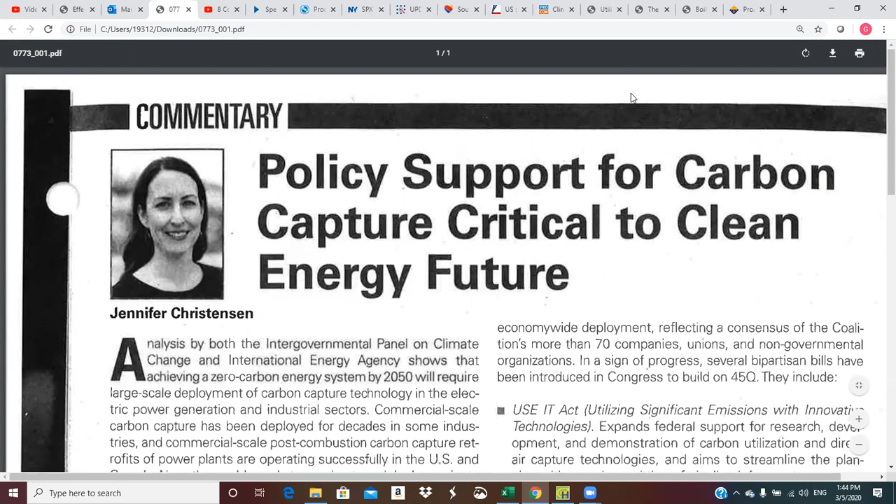Okay, well, let's get started. We're going to talk about this article out of the back of Power magazine. And those of you that weren't here that missed the rambling diatribe before this, shame upon you. You can talk to your classmates and they will, I'm sure, enlighten you.

Jennifer wrote this, and she cites analysis by the Intergovernmental Panel on Climate Change and International Energy Agency, both of which are fairly left-wing organizations, in my opinion. But it shows that achieving a zero carbon energy system by 2050, a long-term goal, will require large-scale deployment of carbon capture technology in the electric, power generation, and industrial sectors.

So this is talking about carbon capture sequestration. There's all kinds of schemes out there. Some people want to capture that stuff and pump it down into geological caves deep under the ground. But of course, it would never leak back out, I guess. I mean, they're going to pressurize it to get it down there, and they're going to pump a gas, or they're going to liquefy it. Either way, it's pretty energy intensive.

And so you're going to have a 200 megawatt unit, and you're going to use 125 megawatts to get the carbon buried down under the ground. After a while, it seems to me like this is diminishing returns. So if we have to do this, maybe there's other alternatives.

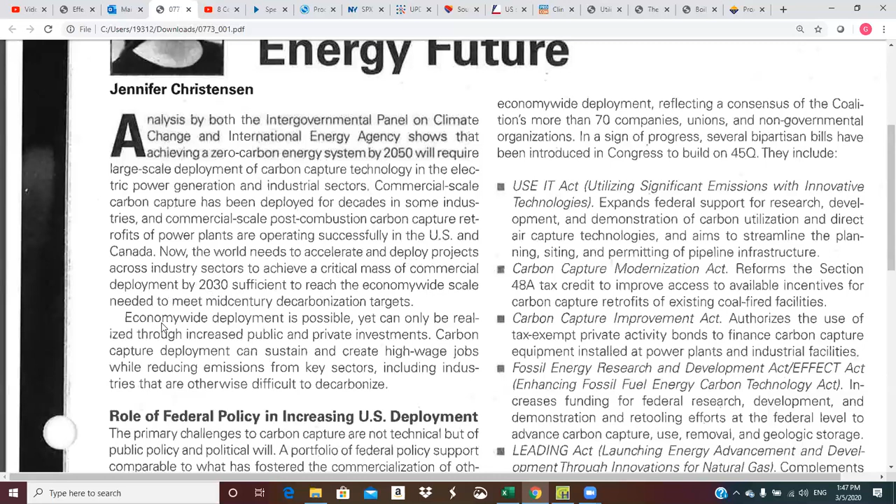Now the world needs to accelerate and deploy projects across industrial sectors to achieve a critical mass of commercial deployment by 2030, sufficient to reach the economy-wide scale needed to meet mid-century decarbonization targets. Economy-wide deployment is possible, yet can only be realized through increased public and private investments.

We're going to have to spend a boatload of money to do this. And who's going to pay for it? You say, oh, well, the government will pay for it. Well, okay, so they're either going to just write a check and it's going to go on the national debt calculator. Have I shown y'all the national debt calculator in here this year? Oh, we may have to do that today too.

Or if the power industry has to pay for this, you know where it's going to come from. It's going to come from the ratepayers because they got no place else to get money. So your utility rate, instead of paying 9 cents a kilowatt hour, if they start doing this stuff on a grand scale on TVA, I'm going to be paying twice that, 18 cents a kilowatt hour. I'll really yell at my wife for not turning the lights off. She won't ever turn a light off. She hates the dark. I hate the light at night because I have to pay for it.

Anyway, that's just the way it works. So that's what this is getting into. Role of federal policy in increasing U.S. deployment. The primary challenges to carbon capture are not technical, but of public policy and political will.

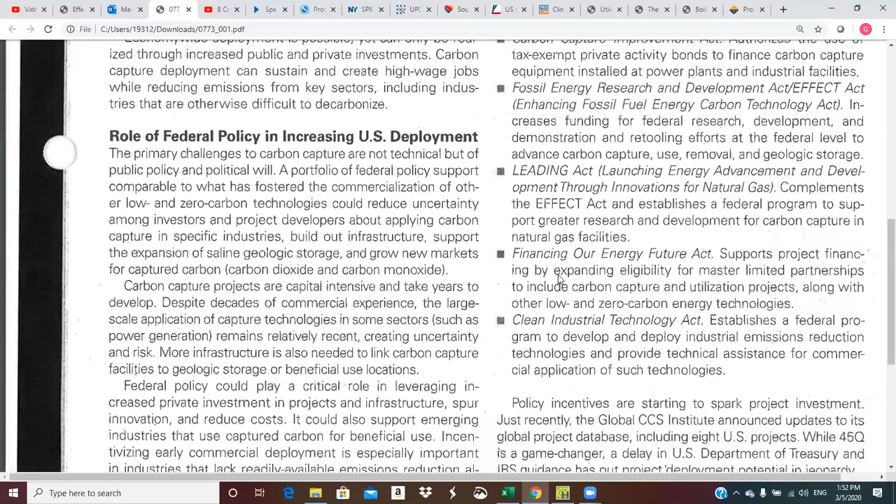Anyway, that's enough, I don't want to do this tirade forever. You guys probably enjoy it more than the other stuff, but anyway, just read through this, and if you want to incorporate a little of this into this little position paper you write, that's fine. You got plenty of time to do it. Okay, comments?

I find it funny that she's trying to say that it's not a technical issue and that it's just a political one, because that's pretty much the opposite of what I think on the problem.

On carbon capture? Yeah, but she's saying it's not technical. Well, I know there have been some pilot projects, but I must say I'm probably not up to the latest on this, but there's not been widespread adoption. Now in some industries, some companies may be recovering some of this in order to produce a carbon-based product that they can sell. If that's free enterprise doing it because there's a market for it, go for it. That's where a lot of the argument is - it's just the technical side of it. Whereas, don't try forcing a lot of this kind of stuff onto the public at taxpayer dollar.

Well, back during the Obama administration, what they supported with some of the solar - what's the solar company? They dumped $500 million in, and then it lasted another 6 months, and then went belly up. Solyndra? Yeah, it was Solyndra. And then there was the one up in Clarksville that had some government support, producing solar panels, and I think they've shut down production because they couldn't compete. But part of that could go back to what Trump's trying to do with tariffs to level the playing field. If he puts tariffs on Chinese solar collectors, then some American companies may become more competitive. I don't know, each one of these issues is pretty complicated.

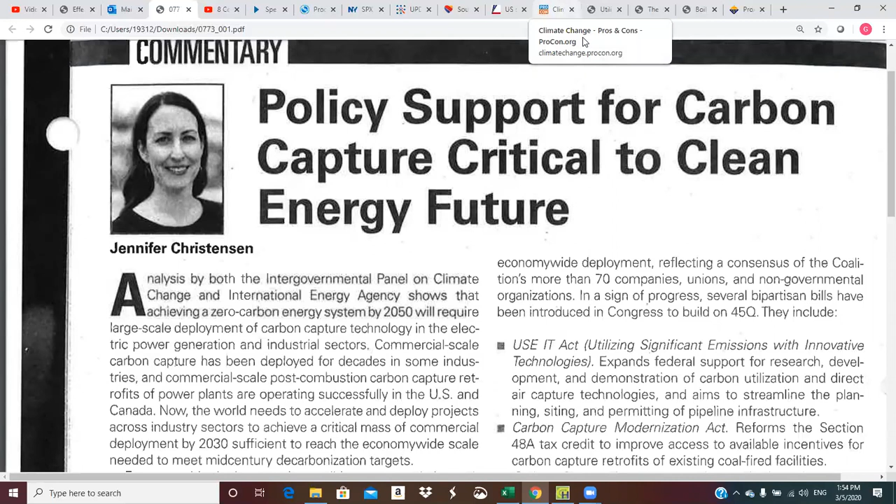All right, so we're through that. We did that. Okay, so back to my cryptic notes. I know you love these. I do too.

I wanted to say a few more comments here. I kind of went through the flue gas stuff. Oh yes, and I have an animation or two for you. So let's start, we'll just go through some of these topics. For SO2, scrubbers with limestone. Let me show you this - this actually, they may show us this. This comes from TVA, but this is an animation of what a utility-sized scrubber looks like.

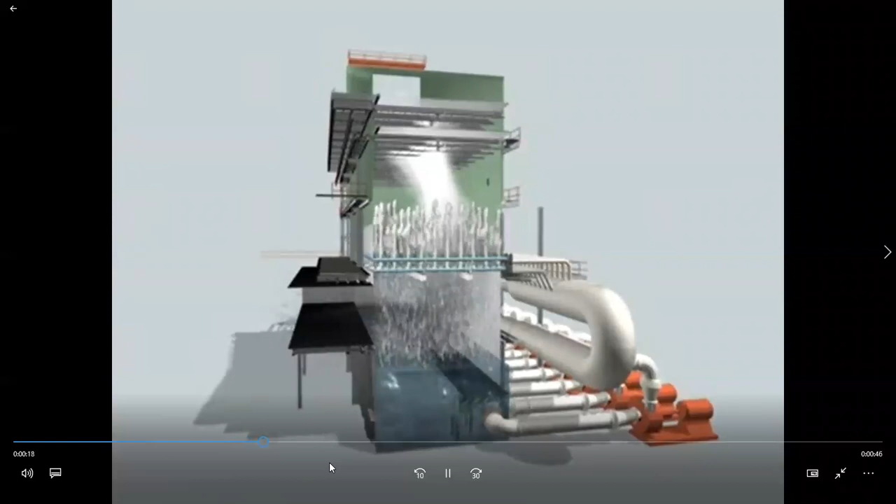This is pretty cool. So there's two different configurations. This one, you see the gas coming in the side and turning up. That is water with limestone dissolved in it. So calcium and SO2 form CaSO4, which is a solid, okay?

And so the solid has to be continually pulled out of the water at the bottom of this. They keep feeding limestone into this, and it's basically a spray wash. Those are the dirty flue gases coming in this configuration, and they come in the top and get cleaned by all of the water sprays.

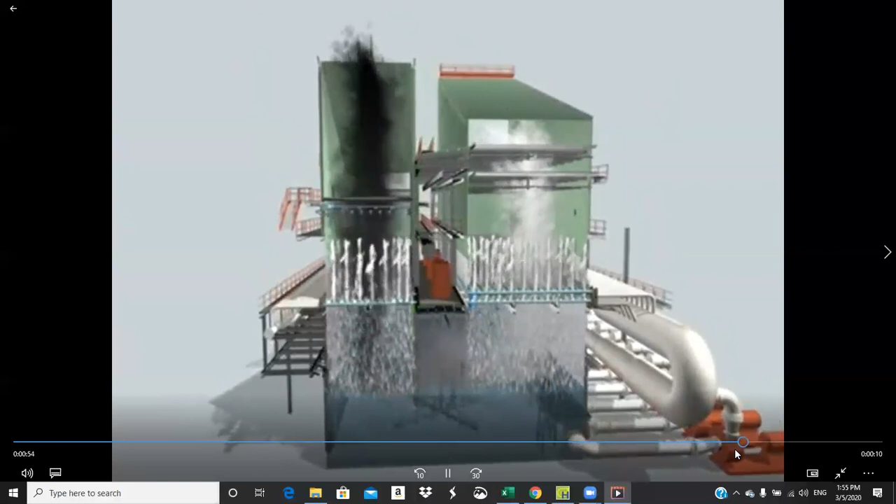And look at all these pumps over here - you've got a whole row of pumps, several thousand horsepower of pumps operating. That's additional plant load, parasitic load, that it takes to make these things operate.

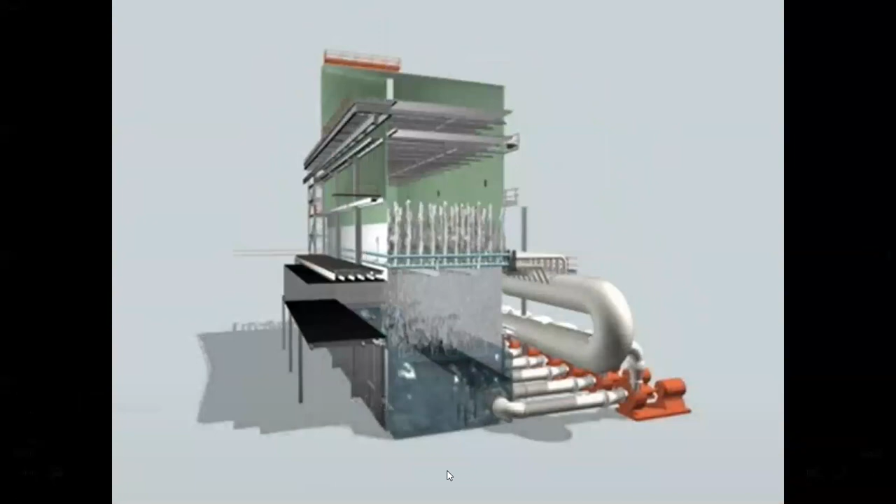If you make the trip to Kingston, they have some configuration you can't hardly see - you just see a big box from the outside and they show you the video. But you can go down and see the pumps and all the stuff that has to operate to make this work.

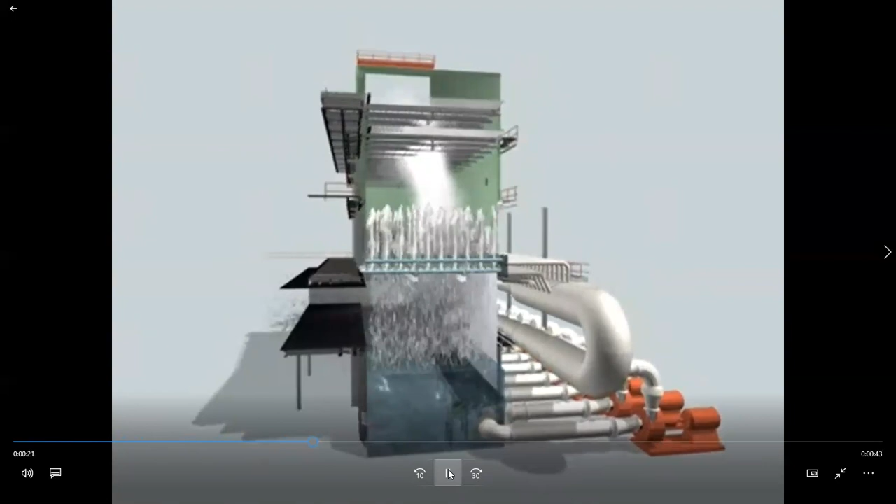Then they pull that CaSO4 out of that water bath, and that becomes a product that's saleable, so that sulfur and calcium can be recycled, like into wallboard and stuff like that. It can be mixed in with that, I believe.

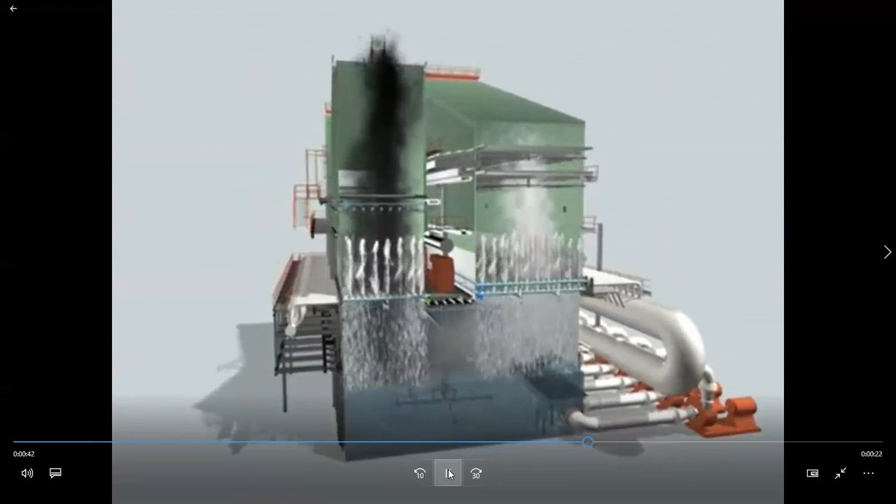So that's how a power plant cleans up the dirty, nasty sulfur, and it's pulling other stuff out of there too. When you spray all that water in there, you're going to pull particulates out, and I'm sure it pulls out some mercury and other stuff. But it's primarily designed to remove the sulfur.

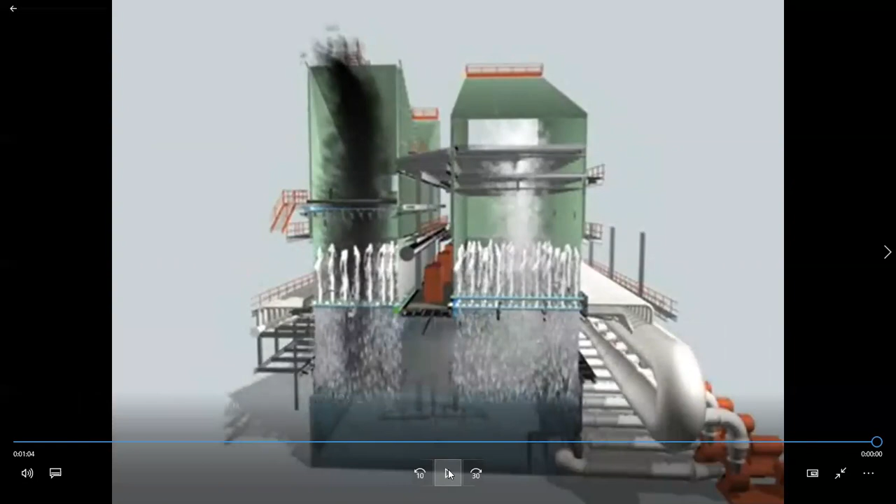So that's cool. All right, and I got another one here we'll get to in a minute.

So that's it. Now on the NOx - you'll get a detailed chapter on this later, but some of this fundamental stuff I want to make sure you get. There's really two sources or mechanisms by which power plants produce NOx, oxides of nitrogen: one is thermal, and two is fuel.

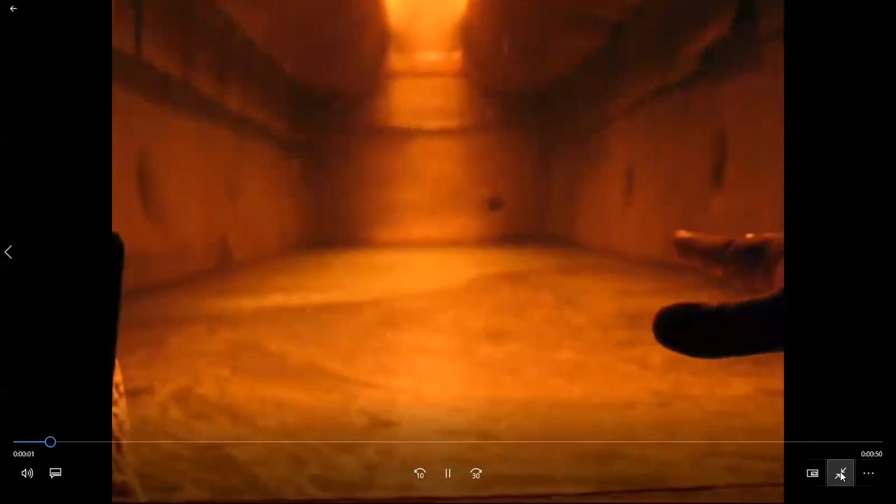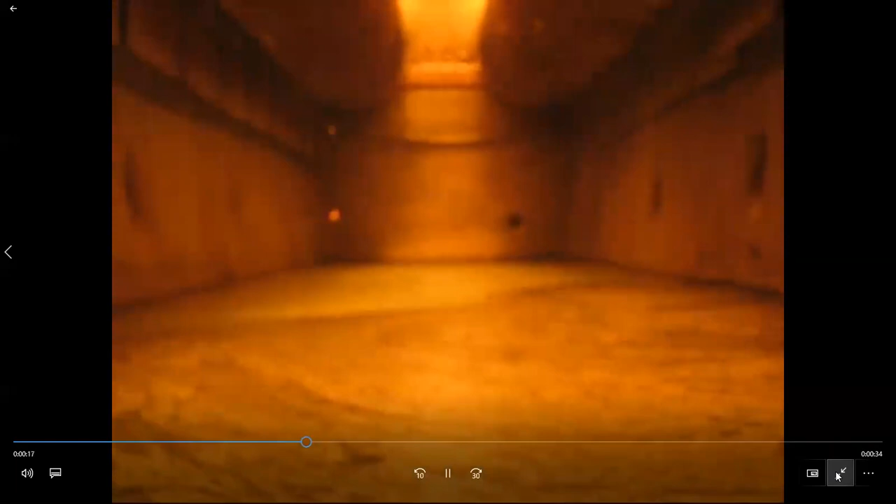This is Kingston. That's down at the bottom of the boiler - that's my favorite view. They got a door, you go down in the basement, open the door, walk up on this little platform, and you look up. This is what they call clinkers and stuff that has attached to the boiler tubes that's fallen down. Sometimes they try to keep a little water down there on the bottom so that stuff will kind of quench out.

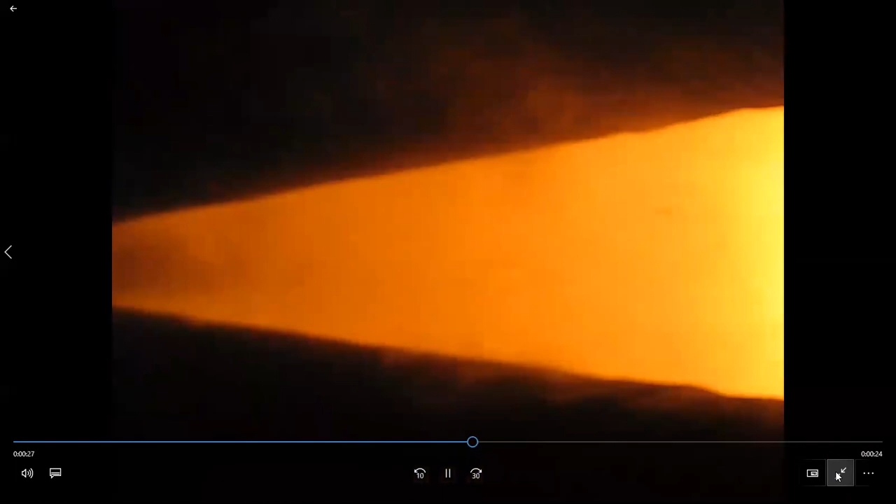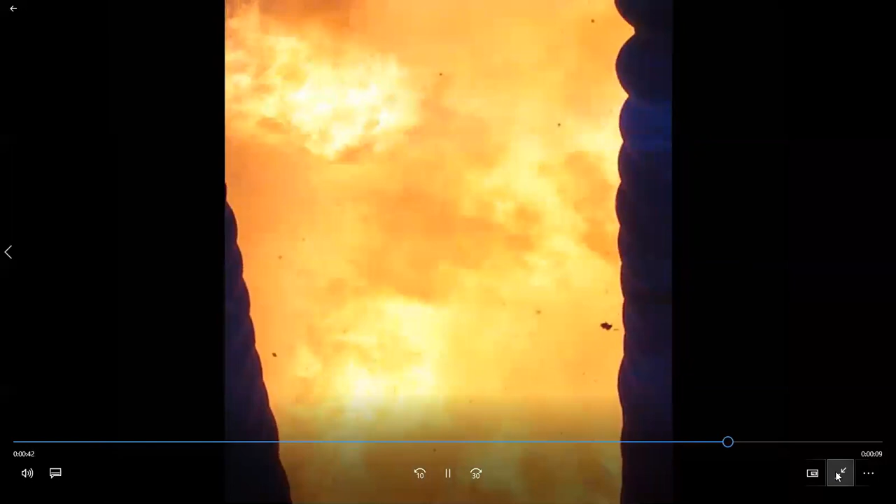But that's looking up - that's the fireball up above. This boiler is probably 100 foot tall, something like that, and we're down at the bottom looking up. You've got these burners shooting coal and air out into this fireball, which is probably swirling around a little bit, and you see the walls over here are lined with tubes.

All of this enclosure is lined with tubes, and that's where the steam is generated. We have water that comes out of the steam drum that gets sent to the bottom of the boiler, and then it spreads out into headers that feed all of these individual tubes. So you have water circulating through these tubes, and that's what keeps the boiler from melting.

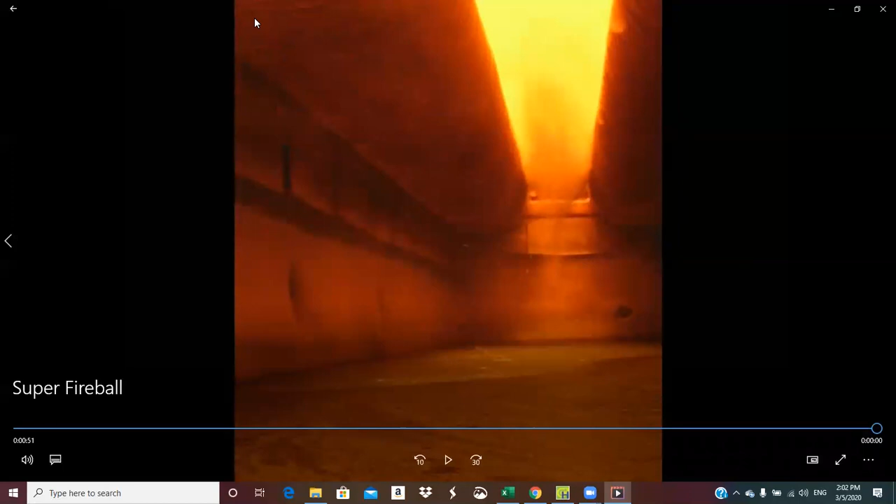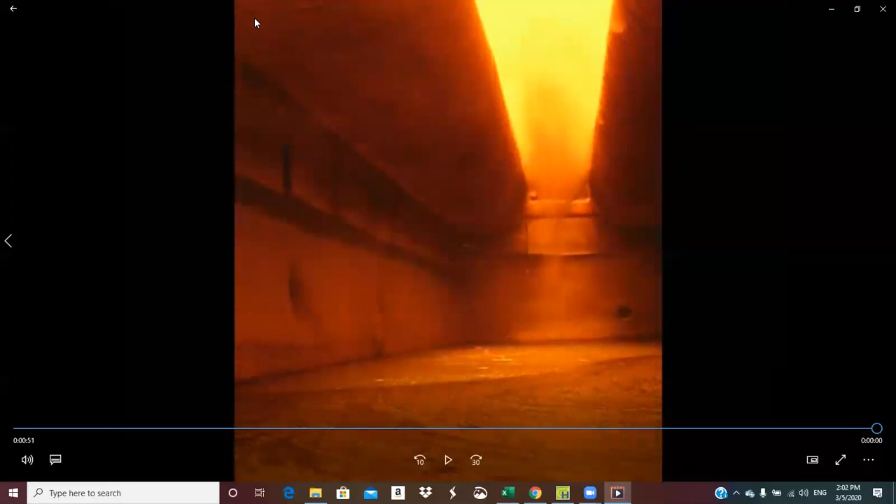Because, if you don't have circulation, water flowing through those tubes, you're going to have a pile of molten metal pretty quick, because this is 2,500, 3,000 degrees. That's hot enough to melt steel. The entire furnace is enclosed with tubes.

I was looking for some pictures. That's Mike Coffey's hand, he was a Tennessee Tech guy. He's sitting there talking, but for some reason, I guess, wow. All you really hear is the roar.

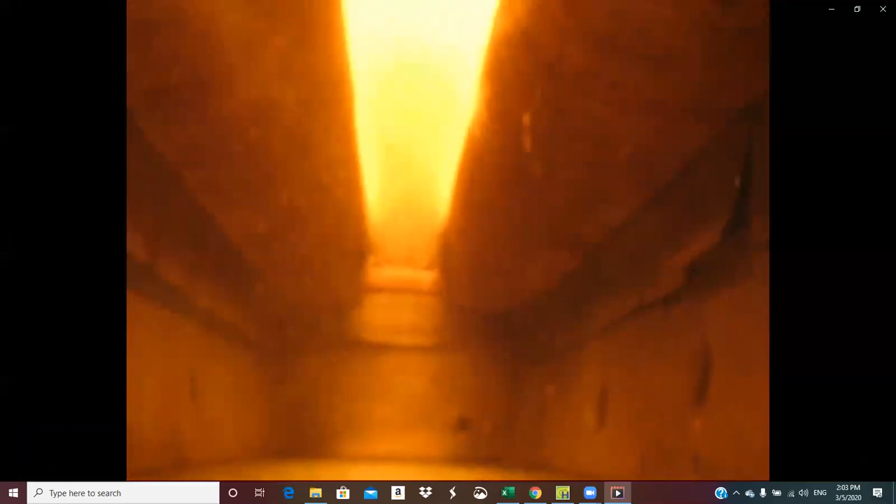So if you make the trip, that's always make sure that we go down there, but there you go. That's the fireball up above you.

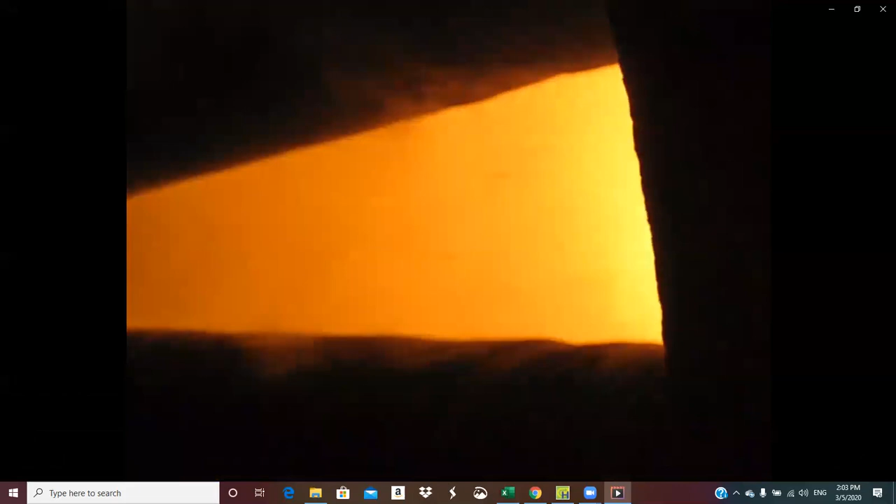And let's see if we get a good shot of the tubes. I think this is somebody, Jackie Sherrill, put this together for me on his cell phone. I've got some others, but he did a better job than I usually do.

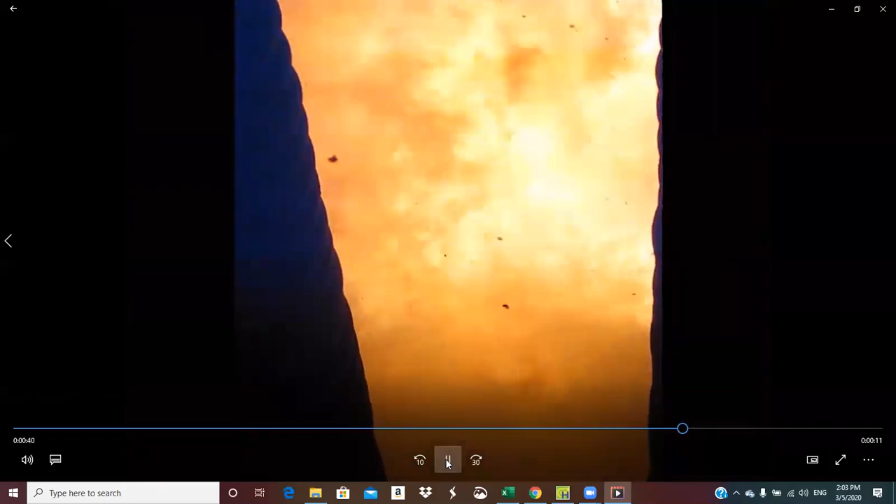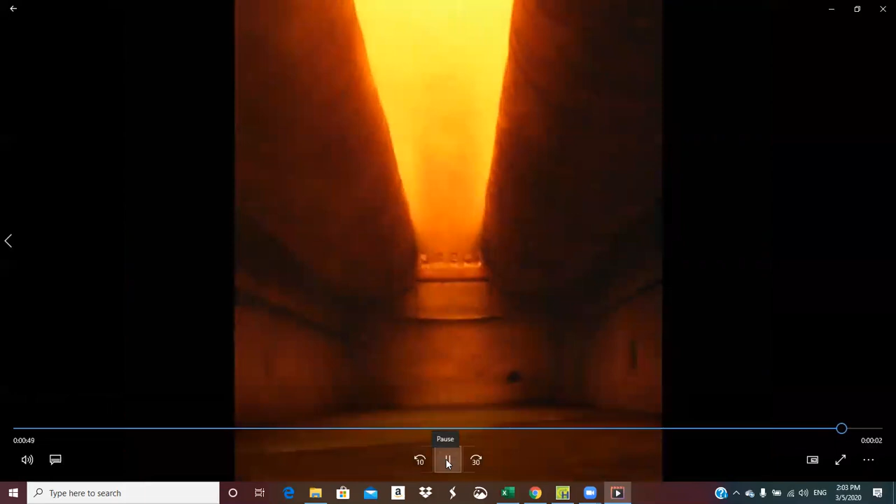Get back over there. I hit the button. There you go, you can see those tubes right there. And they collect ash. They get deposits on them.

All the way through, and this is the furnace section we'll see. So the heat is released in here. The steam is generated in those tubes. The steam goes to the drum where it's separated, and then it goes back to the boiler, back into the convection pass where it is superheated, where the reheaters are.

We've got multiple different heat transfer sections in this boiler, okay? But these are the furnace tubes, called water wall. Those are the water wall tubes where the steam is generated, okay?

We have what's called, see this opening? It has openings every so often so they can put a soot blower lance. They have soot blowers at different levels, and they can roll these things in while this thing is operating, and it blows either high pressure water or low pressure steam. You can use acoustic horns, different ways to knock the ash and soot off of those tubes. So they can clean the entire furnace with different combinations of soot blowers. On any sort of solid fuel boiler, you have to be able to clean the heat transfer surfaces.

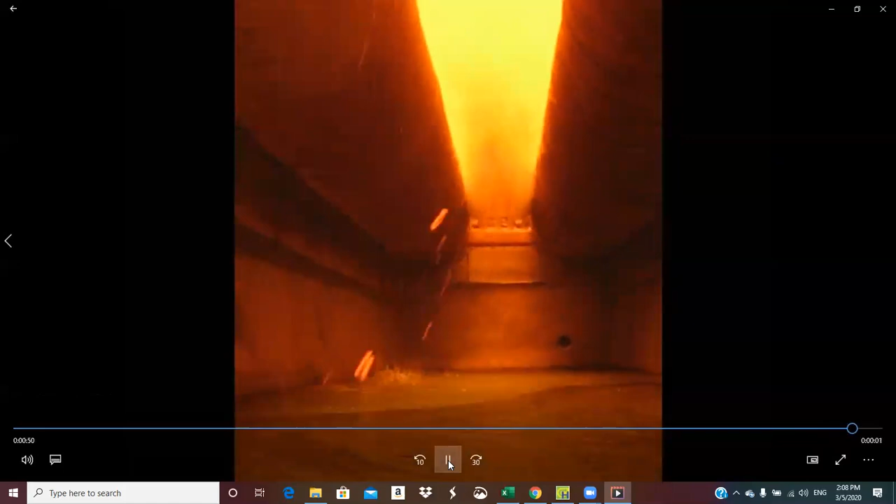I love it. Man, if you wanted to get rid of a corpse or something, just toss it up in there, right? Anyway, not that we would ever be wanting to do that.

Okay, all right, so let's stay on this. So thermal NOx, after seeing that fireball, knowing that we've got all this nitrogen going through that system, what do you think thermal NOx is? Anybody want to hazard a guess?

What's disassociation besides when you unfriend somebody on Facebook? Yeah, it's when an N2 decides, enough, I can't stand you anymore, we're splitting, and they become an N and an N. An N2 is pretty inert, it's a happy couple, but an N by itself is looking for companionship, out making the Friday night bar scene. And if that N meets up with an unsavory character, all of a sudden, instead of getting an N2, you get an NO. And you can't take them home to meet mama, because those O's, man, an N can't bring an O home. It could be worse, you could get an NO2. Or it could be worse, it could be an O3. Now, that's a little kinky. But anyway, that's what's called thermal NOx.

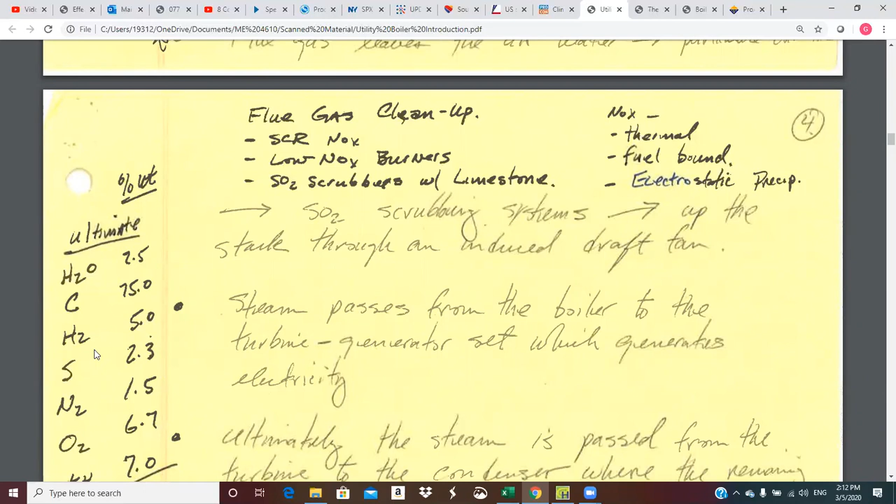Okay, ultimate analysis. This is one of two analyses done on coal, as far as combustion properties. There are lots of different tests - if you look in the Steam book or online, there's ash fusion tests, probably 10 different coal characterization tests, and ASTM standards on all of that. The guys that purchase coal are on top of all of that to make sure they put out the right specs for the coal they want for their boilers. There are different types - anthracite, bituminous, subbituminous, and more. So the world of coal is very complicated.

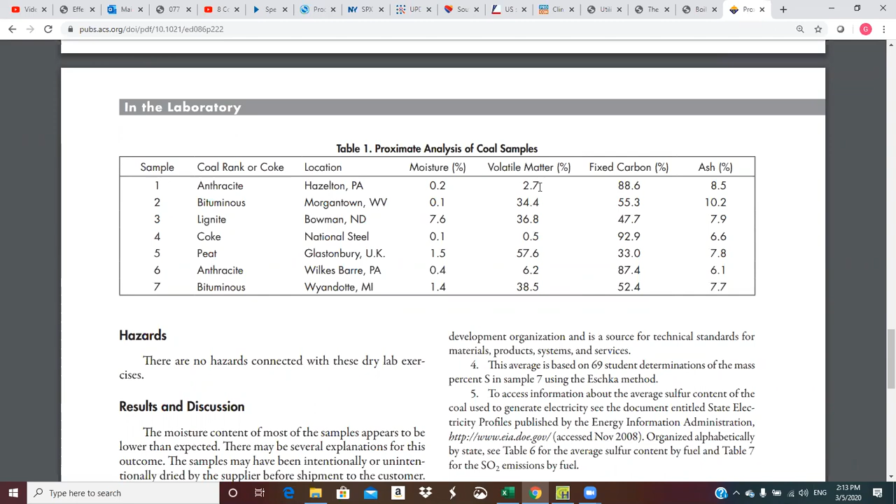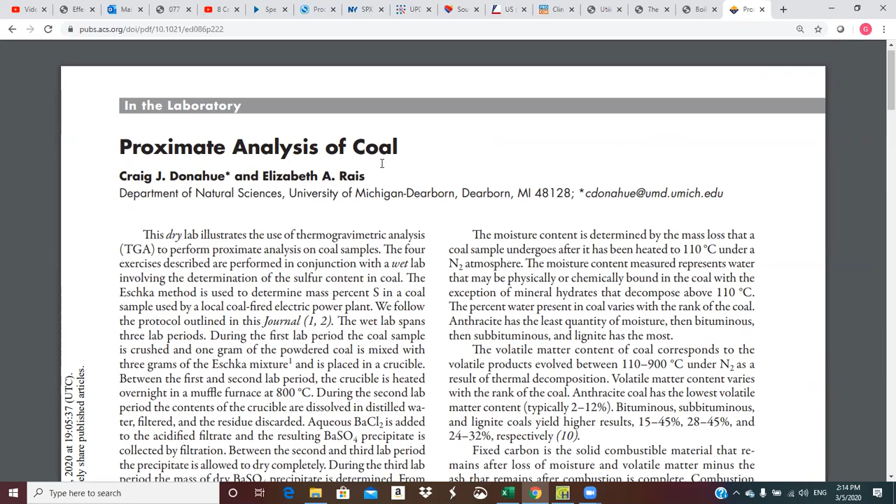So there's ultimate and then there's proximate analysis. I didn't have anything written up in these notes about it, so I searched this up, and I can send this out. This is actually a test - there's a little test protocol here. I hadn't seen some of this before, but this is, in the laboratory, proximate analysis of coal, and there's more here than we need to know.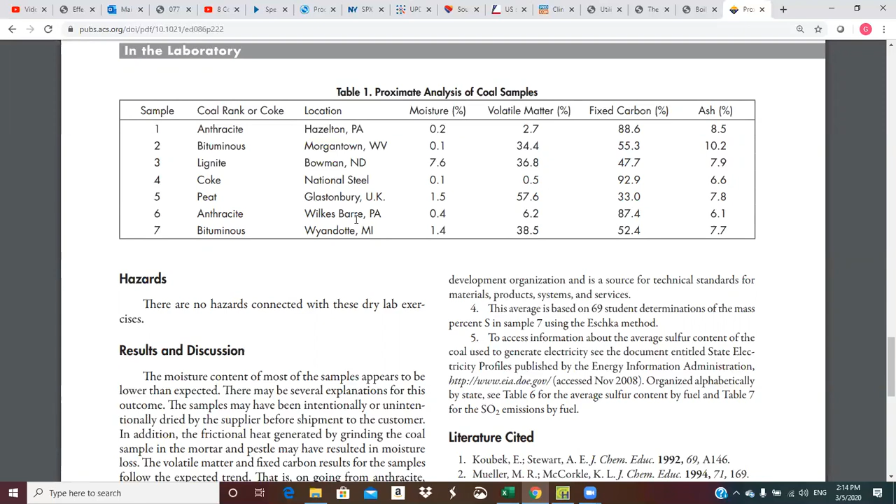What they determine from this is moisture, volatile matter - which is essentially the hydrocarbon gases that can be driven off and burned almost instantly - then there's the fixed carbon, the solid materials that'll burn, and then there's the ash. That's what a proximate analysis is. That other list of all the different elements, I'll put it back up there in a second, is the ultimate analysis. But this is kind of interesting, I hadn't seen this before.

So what they do, apparently - and I had some idea in general but hadn't seen the fact - is they take a certain amount, grind it up, and heat it up for a while. Initially they heat it in a nitrogen environment so nothing will oxidize. That makes sense. You can see it starts out at 100, and after a certain length of time, maybe 25 minutes, it goes down a little bit. Initially that's moisture loss, then the volatile matter coming out - those hydrocarbon gases. Then they switch to air at high enough temperature, around 900 degrees C, that's pretty warm, and then they burn it. So that's the fixed carbon determination until this comes down, and what's left is ash. It kind of makes sense. But anyway, that's proximate analysis.

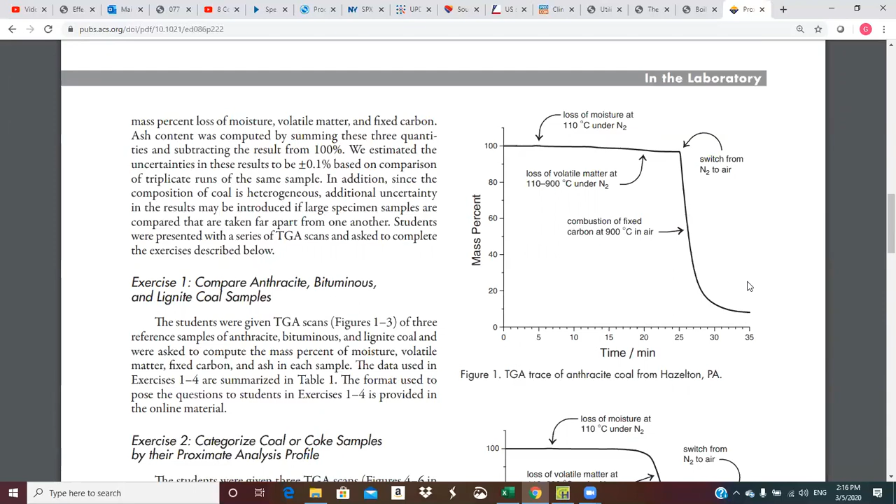And for the ultimate analysis, I'm sure it's got to be much more complicated.

So, do they get one type of coal from a certain region and another type from another region, or can one mine produce both types or multiple types?

No, they get it from different regions. In fact, TVA now, at least the last couple years we've been up there, they're blending. There's PRB, Powder River Basin coal, from out in Wyoming, Montana - that's a big coal producing area. That's more of a low sulfur, high ash, low BTU coal - not great BTU content, but it doesn't have a lot of sulfur, and it does have a lot of ash. They're blending that with some bituminous or subbituminous from maybe Kentucky, Pennsylvania, West Virginia, roughly a 50-50 blend. That's complicated because they've derated the number of BTUs they're putting in, but they do it for emissions - emissions rules the roost. Whatever their basic decisions, the first thing they consider is emissions - what can we do to better control emissions? And then they say, well, that's going to be a hit on heat rate or efficiency - too bad, heat rate's not in first place anymore, it's emissions.

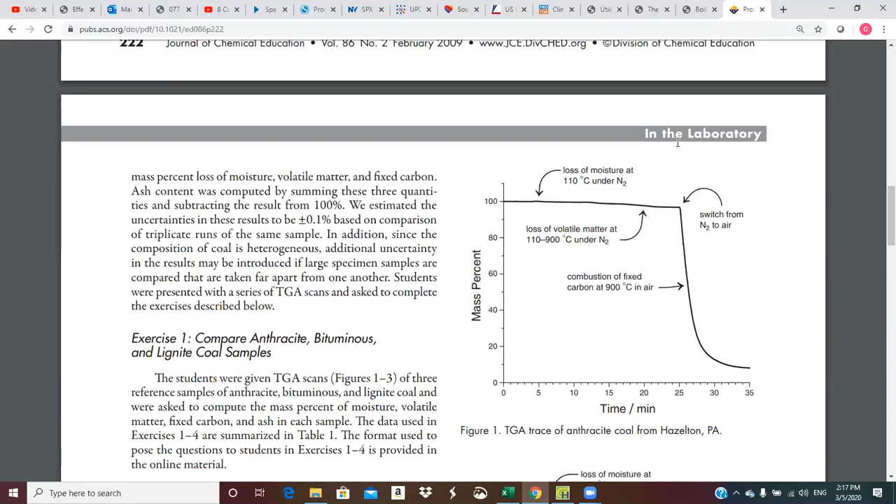So we've got ultimate analysis and proximate analysis.

And if you want to learn more, just Google 'ultimate analysis coal' and you'll find plenty of information that will jump up in your face.

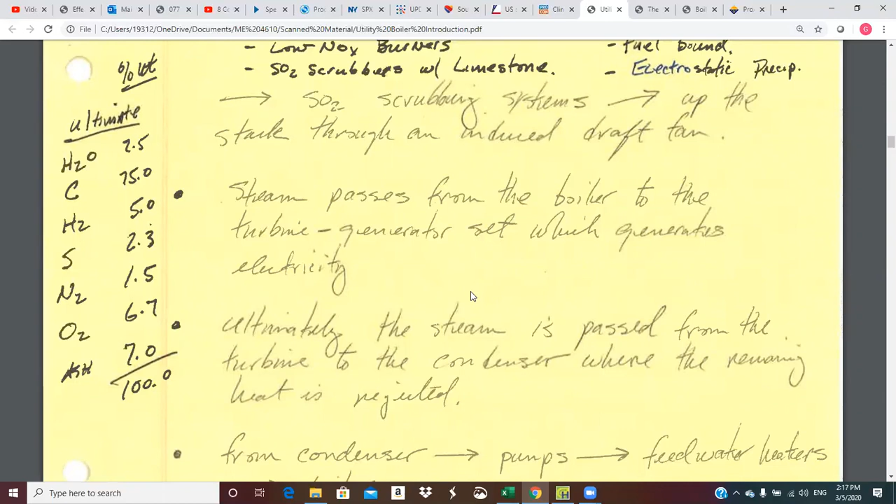Okay, tube spacing. So we talked about different fuels. Now that you've seen the boiler tubes, if a boiler is designed for coal, the tube spacing in the furnace is pretty tight. If I look at that steam-generating portion of the furnace and take a cross section, I've got my structural steel in back, but all of these tubes are basically right beside each other all the way around.

After a while you get tired of drawing these little circles, but they go all the way around like that. And then that water's coming up and that fireball's in here, and some of that liquid is being boiled off into steam, and then we separate that out up at the top. We'll talk more about that when we get to other portions of the boiler.

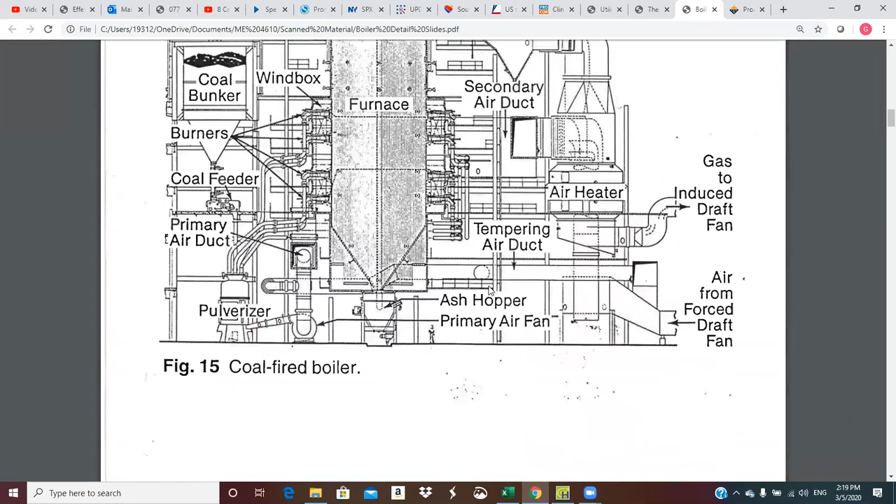Let me see, that's why I gave you some of these. I'm not sure which one's the best. This is pretty good, yeah, okay.

So here's your furnace water wall tubes over here, your fireball, your burners, and all that stuff. The gases come up to the top of the boiler. There's the steam drum, and then they turn sideways and go across all of these heat exchangers. This mixture goes back to the drum, we separate out the steam, and then the steam flows back to these various heat exchangers and picks up additional temperature. So that's where the superheating occurs.

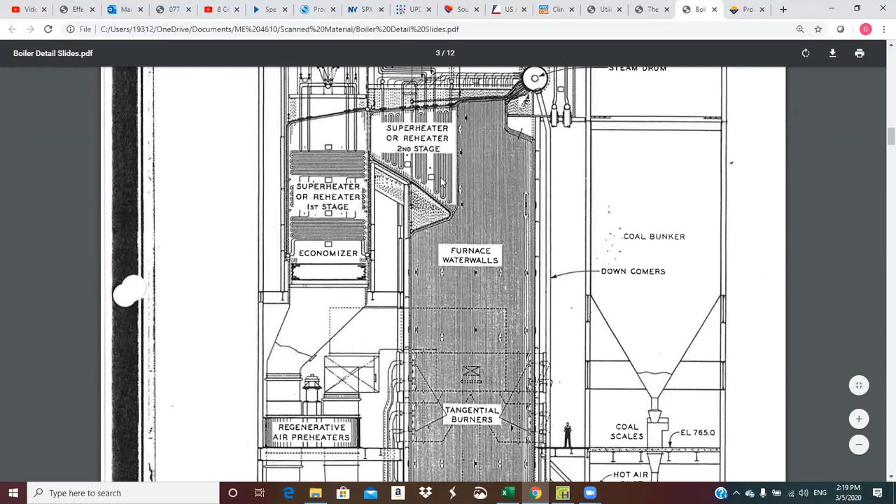So the spacing on these - these are just heat exchangers in the gas pass, and the gas has to pass over there. If you're designing a boiler for coal, you have to leave more passages, more spacing, because this is going to foul up. You're going to get ash, and you have to accommodate that - you've got to be able to spray that stuff and get it out of there to keep it clean. If you're designing for natural gas, you can pack those tubes together because there's not hardly anything to plate out on them on the outside. So your tube spacing in a boiler is dependent upon the fuel it's intended to burn.

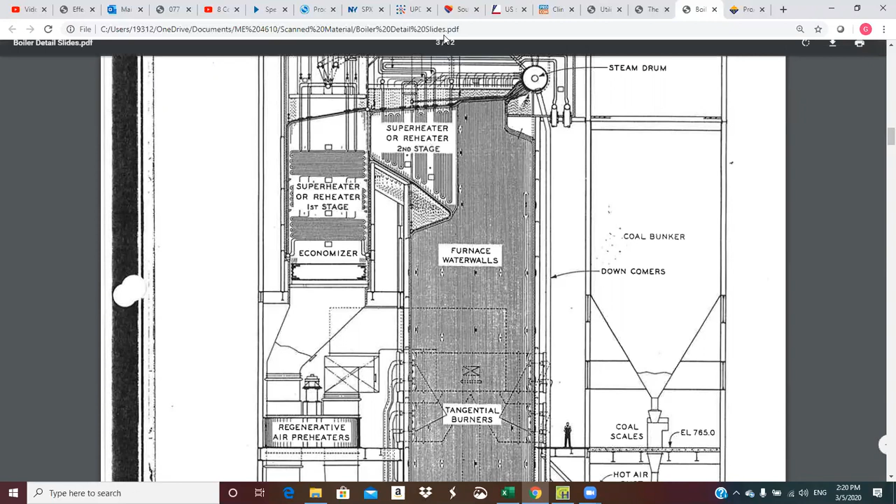So that's the comment about tube spacing, unit size for the same steam production rate. The natural gas boiler is going to be far smaller. You don't have all the fuel handling issues, you don't have to space the tubes as far apart, and all of that. And of course that relates to the expense of the boiler - how much you're going to have to pay for this thing on the front end.

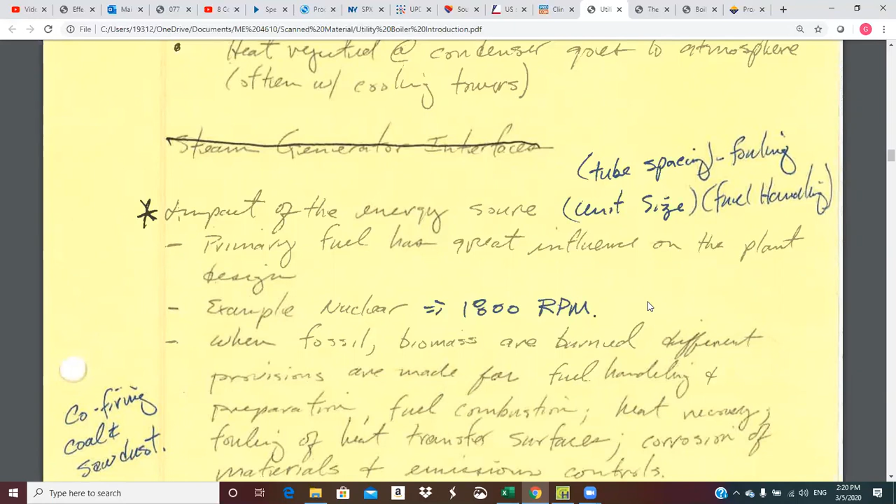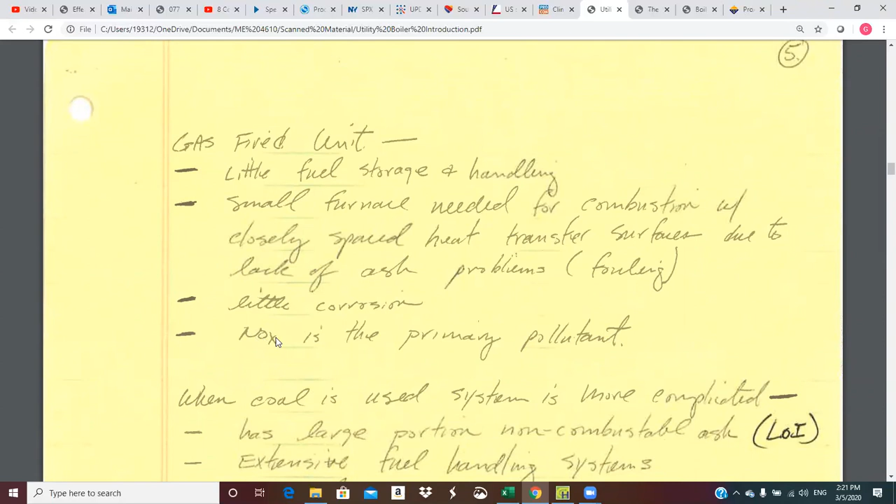Gas fired, yeah, smaller footprint. For natural gas, NOx is pretty much your only real pollutant.

Okay, when burning coal, this is LOI - a power industry term you need to know.

Periodically on a coal boiler, this should be done - I'd say probably every two months or so, I would recommend. I'm not sure what TVA does. You go to the ash pile and you take samples - there's an ASTM standard on how to sample an ash pile. You can't just go out and grab a little cup. You've got to go to certain places and certain depths and all this. But anyway, you get your ash sample, you send it to the laboratory, and they tell you how much carbon is in the ash.

Now, what do you think about carbon in the ash? Is that a good thing? That's fuel that you bought that you didn't burn. So carbon in ash - the power plant term for that is LOI.

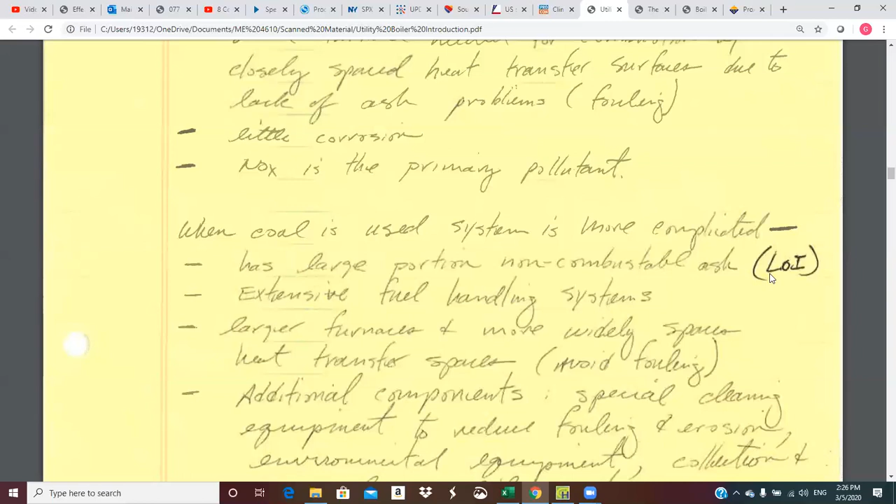Okay, LOI, large furnaces, the additional components. Okay, this is kind of interesting. I don't have figure 11, but I got the steam tables here. What is HFG? This is good for the test. It's the enthalpy of the gas minus enthalpy of the saturated liquid. That's right, so that's the enthalpy of vaporization.

So if we look on the TS diagram, so it's the enthalpy here. It's this one, HV minus HL. And of course, the thermo book calls it FG. Well, subscript here, subscript there, use whatever subscript you want.

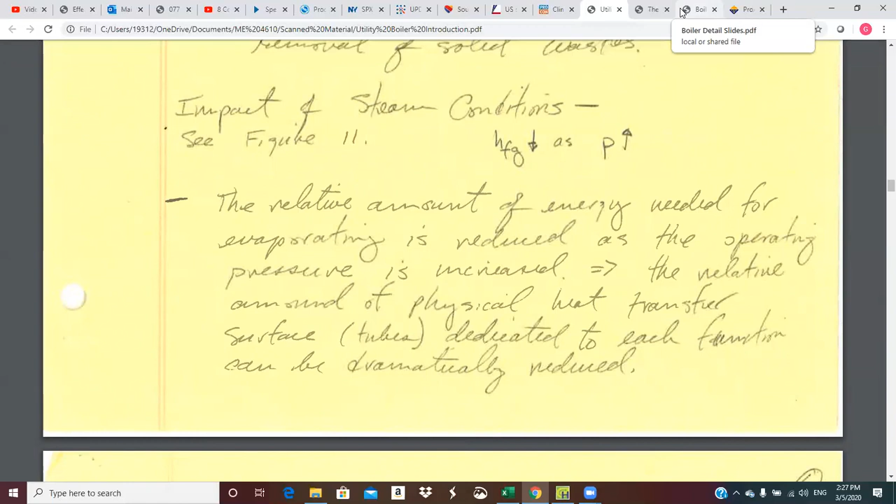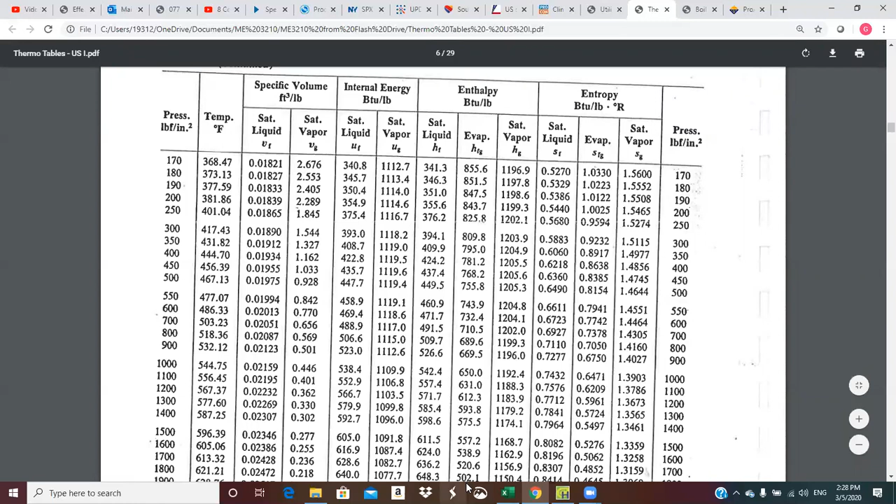So, I don't know if you've ever thought about this, but let's see here. Boiler side, thermo tables. Just to illustrate, this is the pressure table, and here is HFG, and here's increasing pressure. Wow, look at that. Kingston runs about 1,800 pounds. Oh, I'll get up there too far. It's that one. At 1,800 pounds, HFG is 502.

At 200 pounds, it's 843.7 - that's the amount of energy it takes to go across the dome. So that dome is getting narrower as you go up. So relatively speaking, you need less heat transfer in the steam generation area as your pressure goes up. Well, if you go above supercritical, you don't need any, right? Because supercritical is up here, and you don't even go across the dome. So that's what's happening. This dome is getting skinnier.

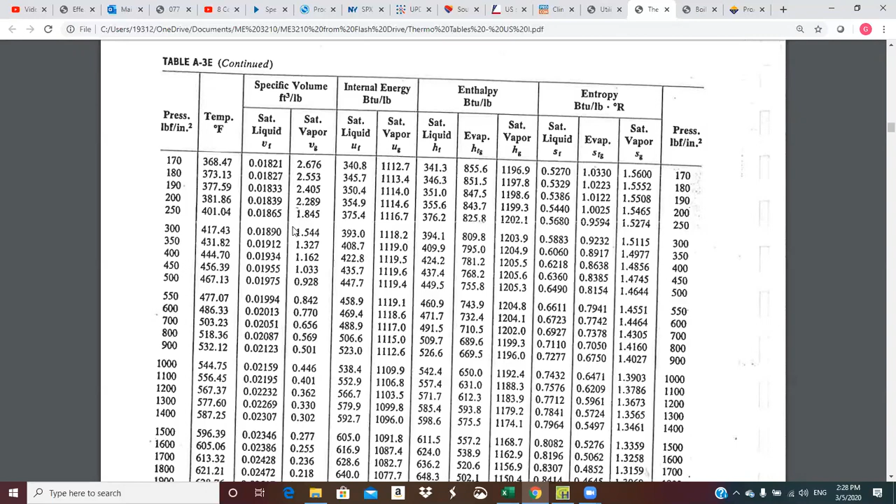But it's interesting. So if I condense a pound of steam, what if I did it at Tennessee Tech? Probably, well, when it comes over here and actually heats water, it's probably 30 pounds. It's probably, let's say 50 pounds absolute. Okay, so at 50 pounds absolute, we get 924 BTUs per pound. If you take steam at, say, 1,000 PSI and condense it, you only get 650 BTUs to condense it. Now, you get it at 544 degrees, which may be an issue for you. Over here at 50, we get it at 281 degrees.

Isn't that funny how the world works? At low pressure, you get a boatload of it, but it's at low temperature. At high pressure, you don't get so much, but it's at a really high temperature. So that's why people will want their steam pressure to be as low as possible - that will give them the temperature they need. Interesting.

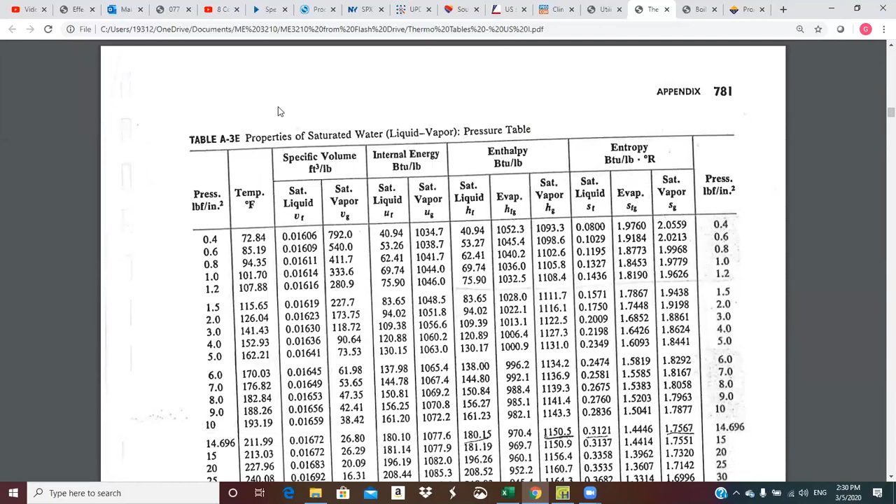And so, you know, another thing we could think about, I thought about doing a calculation. We could, let's say you're running, let's say you got 100 GPM going, say going to your feed water heaters at, I don't know, 200 degrees, something like that.

But you're operating your boiler at 1800 PSI, so that means before you can start vaporizing, you have to get to 621 degrees. Look at how much energy it's going to take just to heat the water.

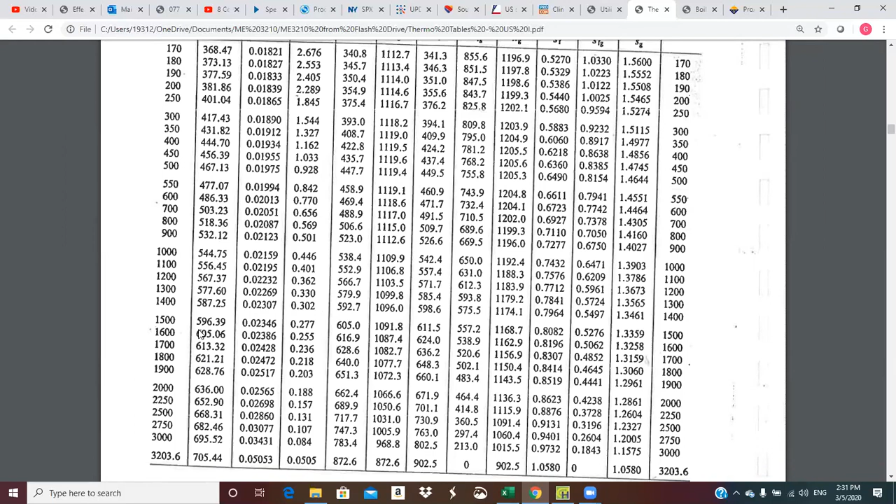That's what the feed water heaters do, that's why we do that regeneration. When we first get back in the steam cycle, the condensate coming back is probably 110, 115, maybe 120, 125 degrees, but we've got to get to 621 before they can start making steam at Kingston. That's what those feed water heaters do - they boost that temperature, maybe get it up to 400 degrees before we go into the boiler. Thermodynamic theory tells us that helps our efficiency.

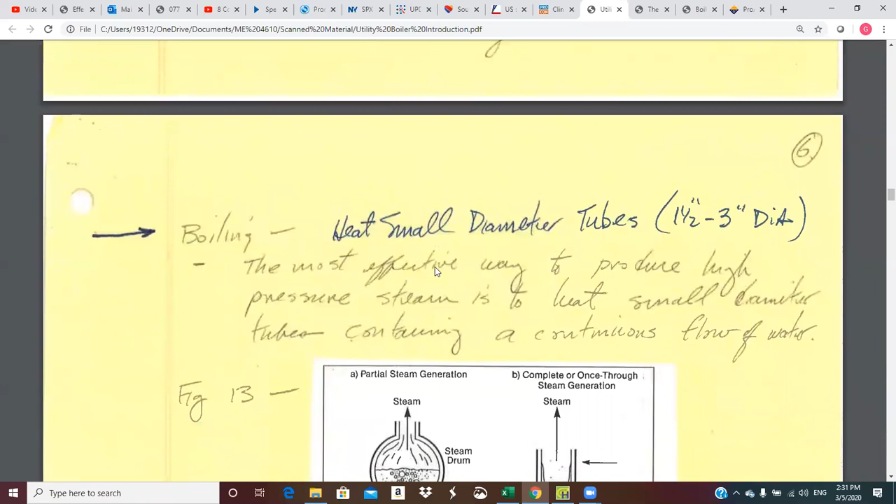Like a startup, it's just everything driven by the boiler. The boiler has to get hot before everything else. They'll fire either with natural gas or fuel oil until they get the boiler going, because you can't start up on coal.

They have lances, and Kingston uses oil, probably diesel, number 2. They'll fire the boiler and have to get it up to a certain point before it can sustain, because when you spray those coal particles out there, it's got to be hot enough that those things will auto-ignite - hot enough that the volatiles come out and burn, and the carbon starts burning immediately.

Otherwise the particles will just kind of hang. You could get an explosion because you get a particle-laden atmosphere and then all of a sudden the thing blows, like a grain silo blowing up.

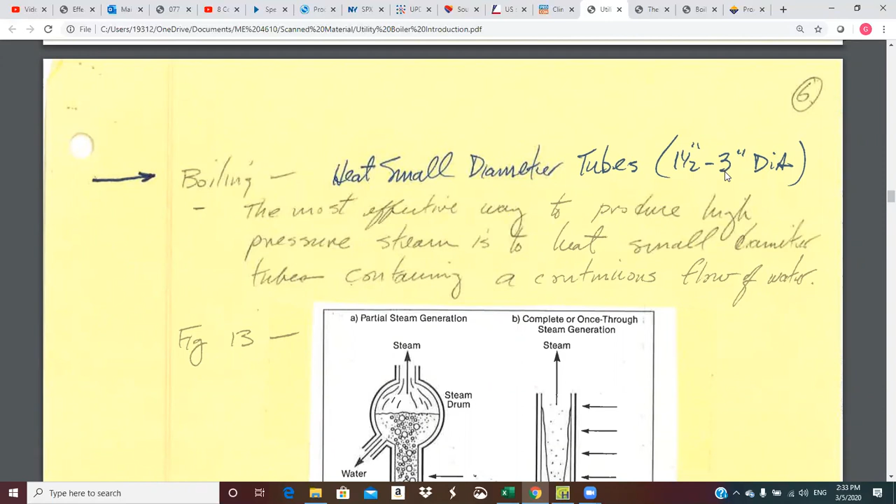Yeah, they start up on something else. So let's see - we talked about small diameter tubes, that's what lines the boiler. The other heat exchangers may be slightly different diameters, but a lot of tubes. That's where the steam is generated and the heat is transferred.

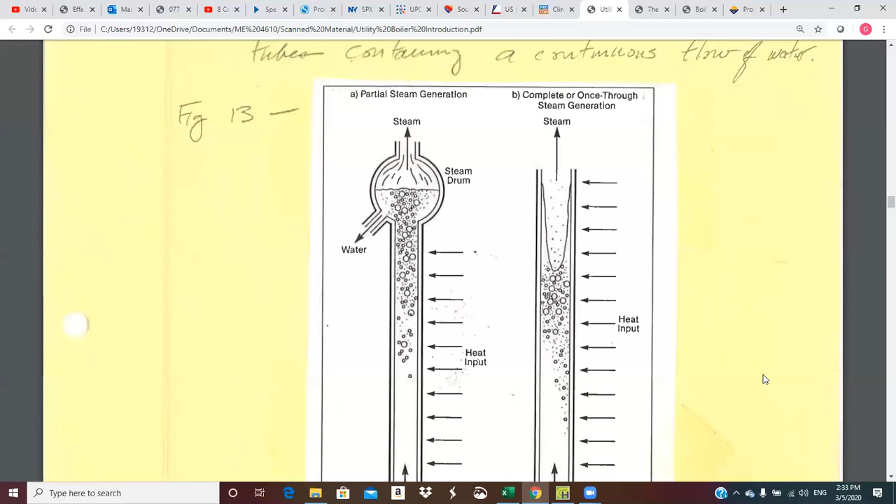There's actually two varieties of boilers. It's kind of like you can get a manual transmission, or an automatic like your grandmother has. I've got a BMW with a 6-speed in it, and I'm really partial to it. But anyway.

So the drum boiler has a steam drum. The once-through boiler has no steam drum. You don't see as many once-through boilers - they're a little harder to control, you've got to do this just right. So we'll talk about the drum boiler first.

So it has a main steam drum at the top of the boiler. Let's go back and look at the picture we had going here.

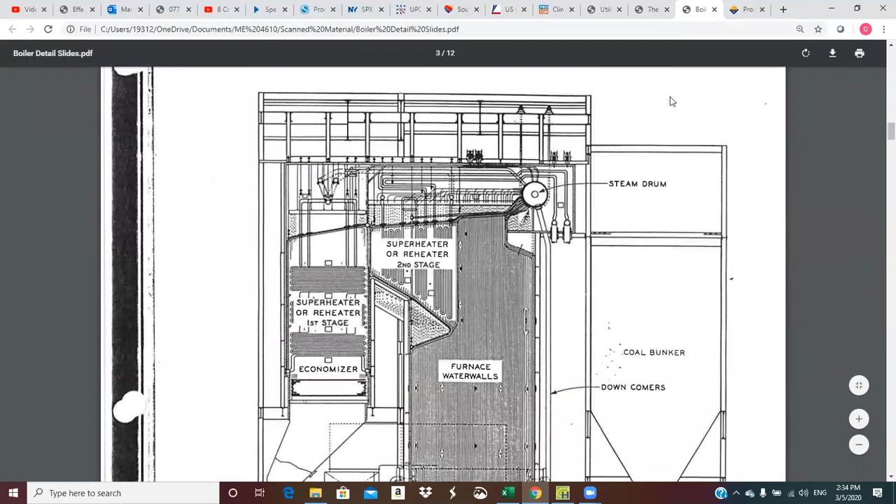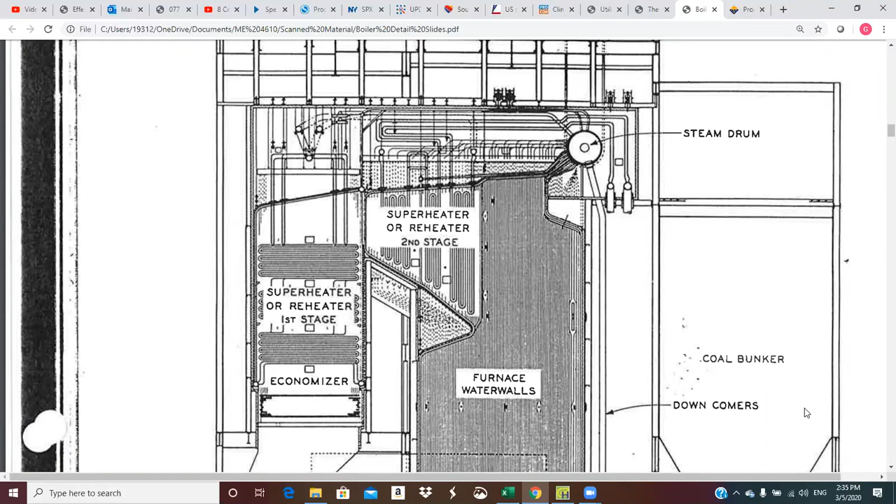Your feed water goes to the drum, and makeup water goes to the drum - it may already be mixed with the feed water, or it may be a separate line, depends on the design. All the makeup water goes to the drum. Then it flows by the downcomer down the backside of the boiler, down to the bottom, where it hooks into the headers.

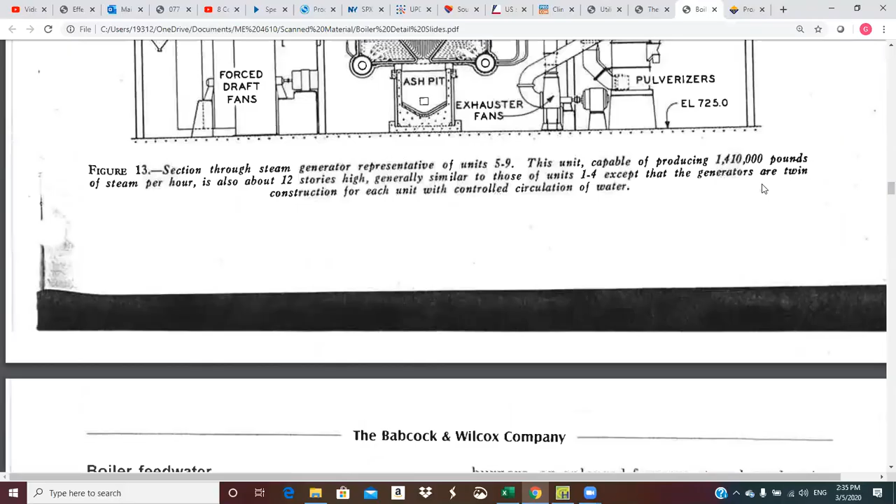Then that water rises up, part of it vaporizes and goes back to the drum. Back at the top of the boiler, there's another header where all of those tubes come into, where that mixture goes - or it could be that the individual tubes go to the drum, or you could have a header that accumulates that flow, and then you take the single flow back to the drum. It depends on the design.

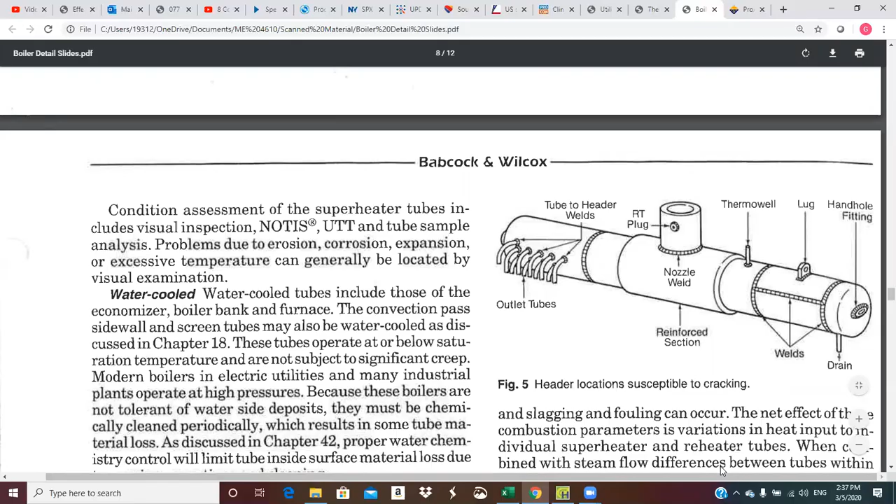Some drums are big, and the individual tubes will stub directly into the drum, so you can have it both ways. But when you hear header, what needs to pop up in your mind is a picture like this: a central pipe feeding flow into individual tubes, or the flip side, all these individual tubes feeding into here that then feeds this. So I'm either combining all of these individual flows and taking that up here, or I'm going the other way, spreading out into these individual tubes. It's a fairly simple idea, but critical to the operation. We've got to have these headers to work with all of the tubes in the boiler.

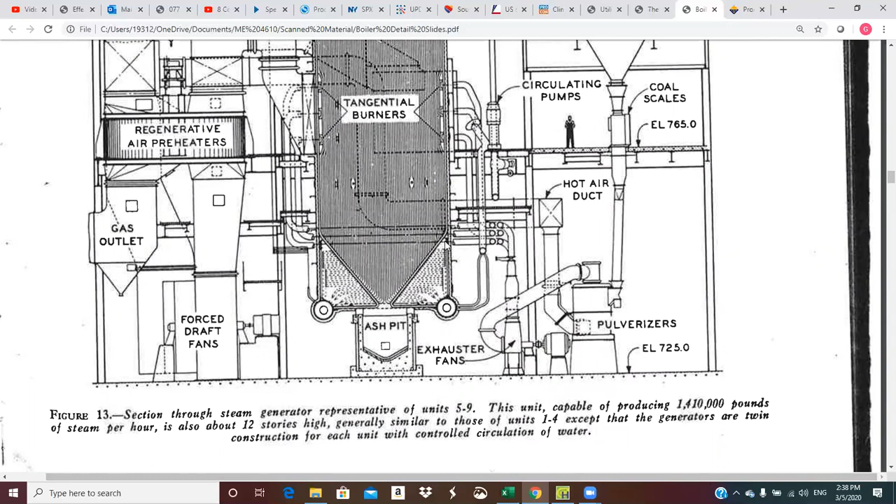I think we've pretty well described this. We come down in the downcomers, and we eventually get to the bottom of the boiler, and we feed it. It's hard to see exactly where they're bringing this. There's downcomers. Anyway, it feeds into all of these individual tubes.

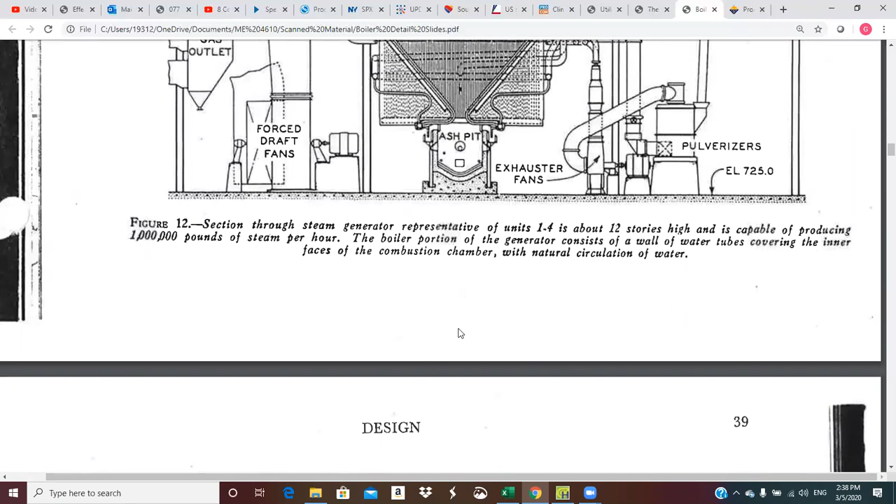Okay, so let's write some of this. What are some functions of the steam drum? Well, it receives feed water slash makeup water. That's one thing.

You can do chemical addition into a steam drum or into a line that feeds into a steam drum. So it can facilitate chemical addition.

We have the steam separators in the drum that separate out the steam from the returning feed water. So the steam separators are in the drum.

And the fourth function is that it holds a reservoir of water at the top of the boiler to make sure that these tubes don't go dry. If those tubes go dry, you've got a fireball, you've got a big problem. It doesn't take long - you'll over-temperature the tubes, you'll damage them. If it goes on too long, you can start melting them. And so that's a pretty important function.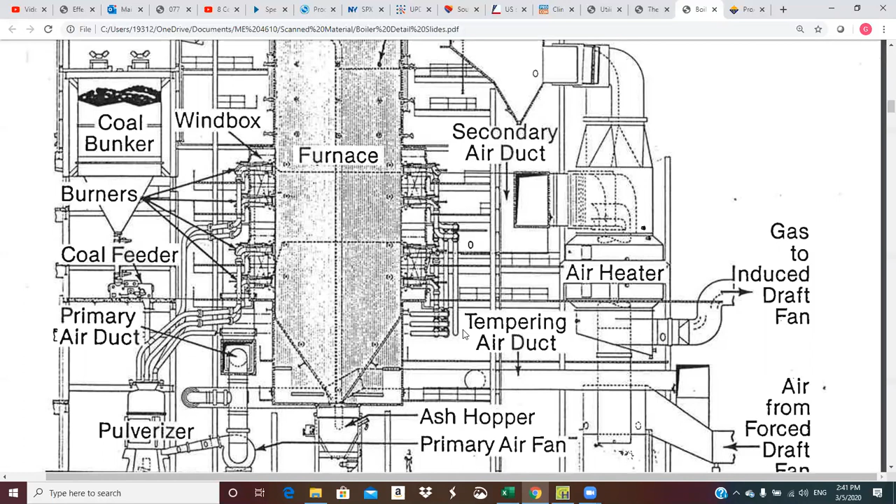I don't know, can you all see over there, maybe not.

It's interesting - you talk to the boiler guys and they're concerned about the condition of their boiler. What they care about is keeping all of the temperatures in the proper range. And we do that by keeping, it's the mass flows through all of the tubes that cool them, because you're dealing with gases that are far too hot to put across a tube that doesn't have flow. So the boiler guy would say the most important measurement in the plant is drum level. There's a couple others - you don't want to blow something up, this and that - but drum level is an extremely important measurement.

Yeah, it's possible to inject - sometimes you'll have a chemical feed into a feed water line, or it can even go into the drum too. Usually it's some kind of oxygen control. At these pressures, they probably don't do much of that. But in industrial type boilers at lower pressures, they don't necessarily have the reverse osmosis and the really top of the line water treatment that a power industry's got to have. I don't know if we've said this, but as your boiler pressure goes up, your boiler water quality has to go up as well. So when you're running 1,800 to 2,400 pounds, you've got to have awfully good water.

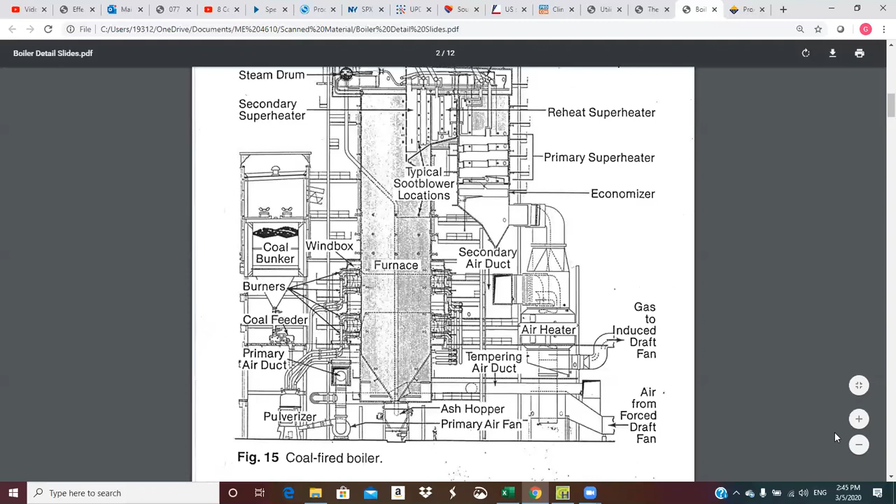It's important to realize the significance of the water level. Having a water level here - I was going to write up there about drum level being an important control parameter. The operator always keeps an eye on that drum level. If that drum level goes down too much, or if the rate of change of drum level decreases too much...

...it indicates that there may be a leak, and they have to be very careful to come down if it looks like they're going to run out of water.

What about blowdown, Dr. Cunningham? Is that where the blowdown comes from? Yep, yeah, that's good, I should put that up there. Drum level is a critical measurement, I guess, for operators to watch.

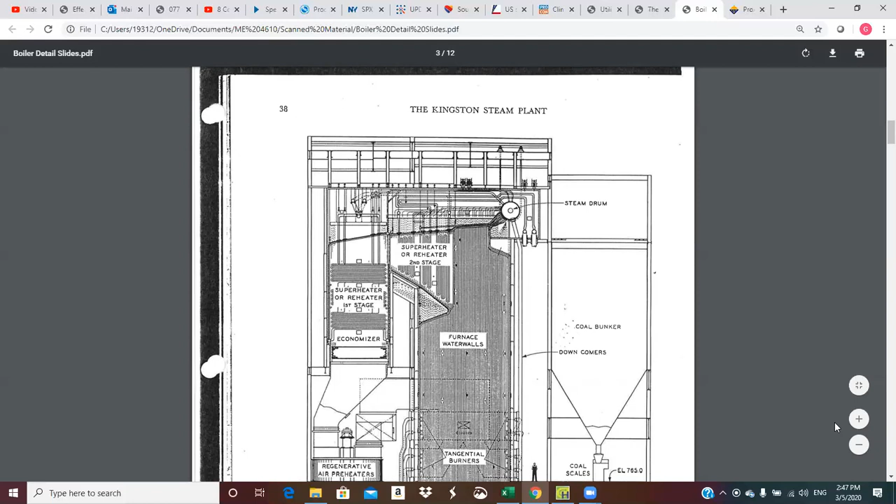We'll put number 5 up here: blowdown can come from the drum. Normally, on smaller systems, but utility designers will pull all kinds of different tricks. In general, that's what you're doing - you're blowing down water out of that drum to control the dissolved mineral levels. But never all of it, just some portion of it.

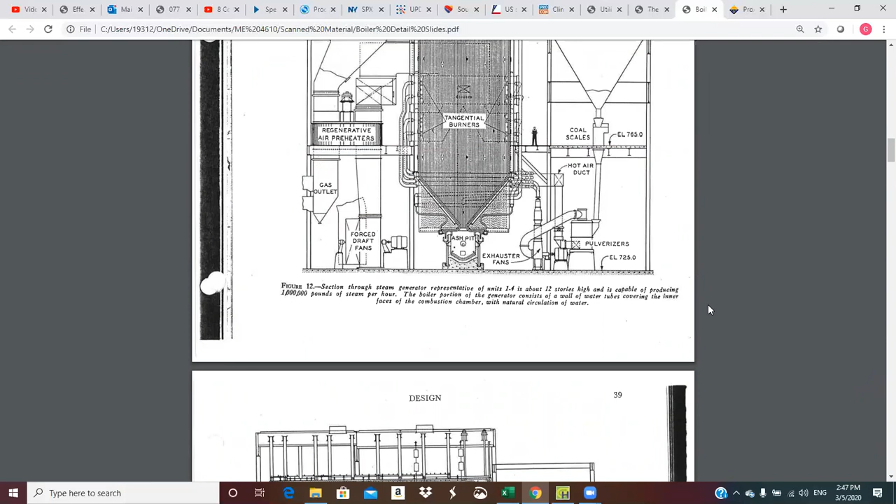You have to have water in the drum. You're never going to drain the drum - oh no, not you. When you're operating, you have to have water in the drum. So blowdown doesn't drain all the water. Oh heavens, no.

Blowdown is small, and actually there's more than one type of blowdown. The blowdown that controls the conductivity is usually a continuous bleed. It's a small continuous bleed, and it will come out of the drum.

The lower areas of the boiler, the headers down here - utility boilers don't have a lower drum. Industrial boilers usually have what they call a lower drum down at the bottom of the boiler, and the bottom blow will come out of that. They call it bottom blowdown, and it's just done a couple times a day.

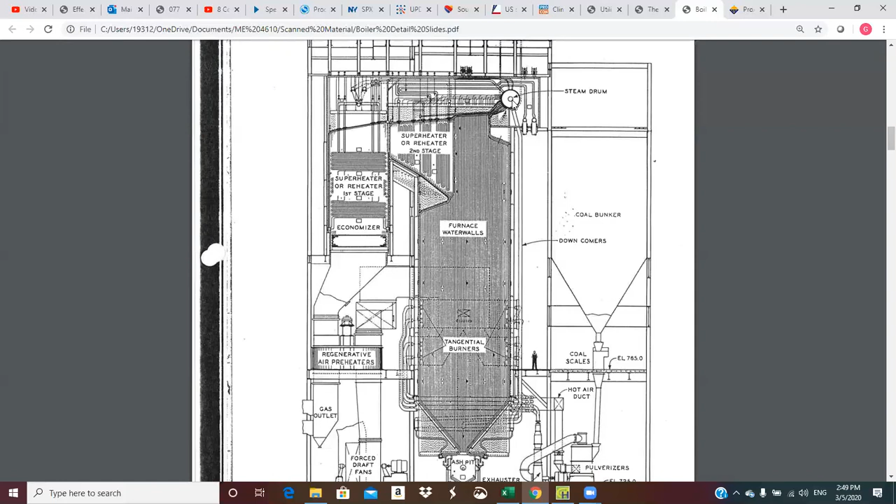They'll open a valve and count to 10 or something to blow out any crud that has come off the inside of the tubes and fallen down. It's an opportunity to drain some of that out of the lower stretches of the boiler. So the headers down here at the bottom - they'll blow down those headers to make sure those tubes don't get plugged, so we can continue to feed up through there.

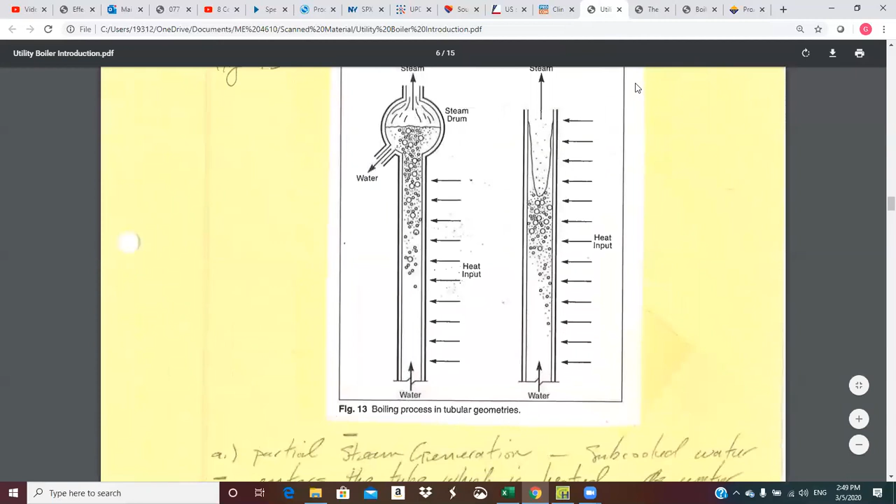Let's see, I think we are just about done here. Let's see. There we go, yeah, that's a good place to stop. So we'll pick up here next time.